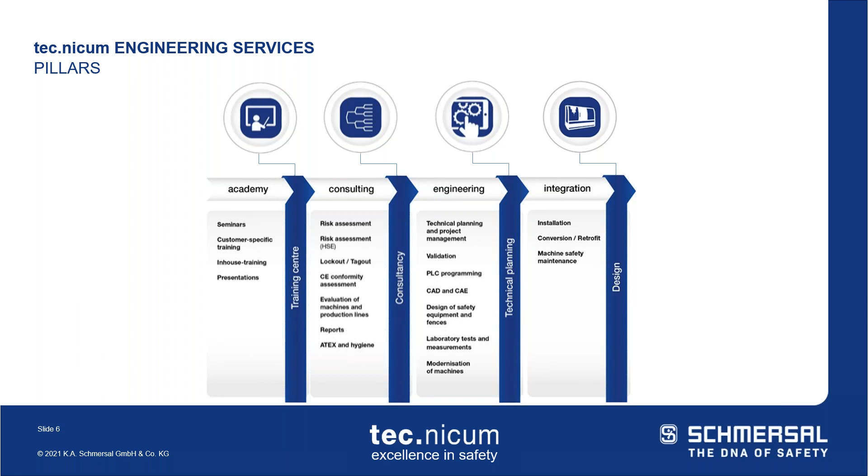All right, so again, we're going to take some time to look at each one of these pillars to further explain what we do within our engineering services department, and that first pillar being academy.

So what are some of the courses? What are some of the trainings that we offer? The first one I want to point out is the OSHA training. As you may know, OSHA has this outreach training program for general industry. They offer courses that are 10-hour or 30-hour courses. Following the course, you would get a certificate from OSHA, like a little card stating that you completed the 10 and or 30-hour course. This is something that we are able to offer, all right?

And this is the official OSHA program. So if you take it with us, you will still get the official OSHA card as you would have gotten if you'd taken it directly at an OSHA training center.

I mentioned taking part in an official OSHA training center, because that's the only place where OSHA will teach the 10-hour and 30-hour course. Whereas at tec.nicum, our engineers and instructors have gone through OSHA train-the-trainer, so they are OSHA authorized trainers to provide the 10-hour and 30-hour course, which is why you'd be able to obtain that official OSHA card.

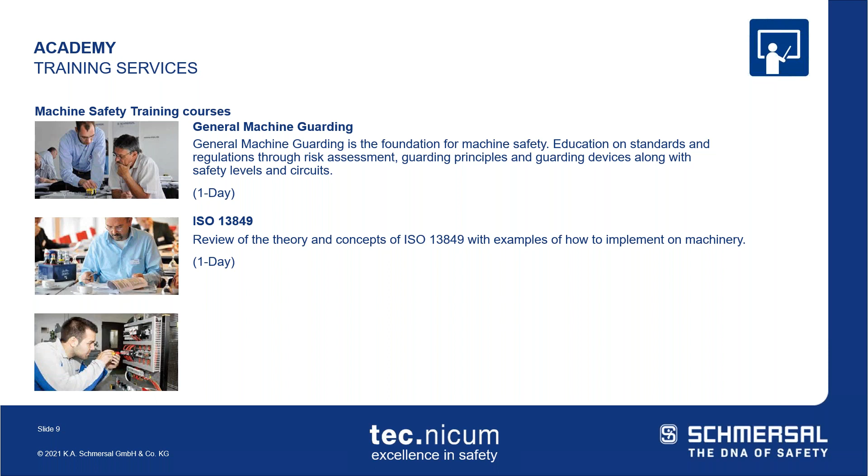But one thing we do is pull examples from the class. We say, okay, let's look at a machine that we may all know, and let's look at some safety functions, and let's do the calculations together to help drive the training home. So it's definitely a more hands-on approach than a lot of other standard trainings I've seen, something a little more unique.

Also, looking at some hands-on training, we offer a safety circuit and wiring course, a full day where attendees are given a trainer board, essentially a safety controller, some contactors, some push buttons, and some LEDs to turn on that would simulate a machine turning on. We go over the different concepts of categories and safety circuits.

What does a reliable safety circuit look like? What does a redundant circuit look like? Then we throw in faults and errors into the circuits to show you exactly what you're gaining going from a single channel circuit to a redundant circuit with monitoring. There's one thing to talk about it, and it's one thing to even see a schematic.

It's another thing to actually wire it up. So this is more geared towards electrical technicians, maintenance personnel, and controls engineers who have an understanding of circuits. Then we go further to say, here are safety circuits, this is what a safety circuit actually looks like, this is what you're gaining. We go over some things common within the industry that aren't really safe, some misconceptions, and then go over things that actually make a machine safe.

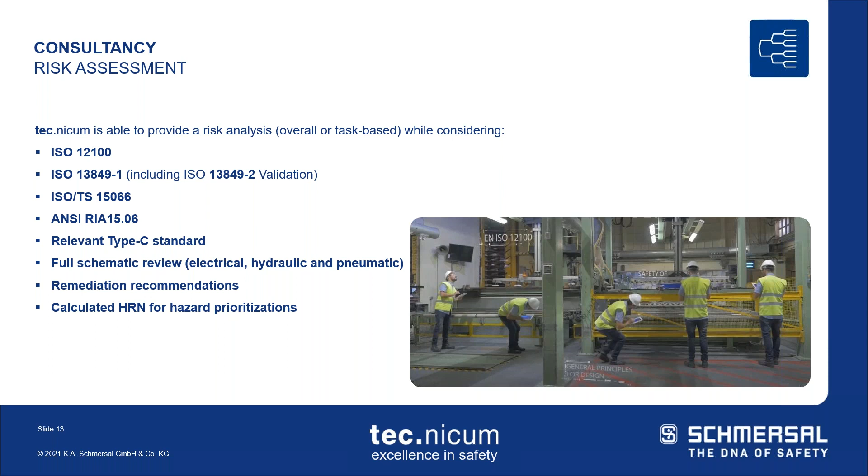Okay, we not only identify the hazards, but we also quantify the hazards that we identified, and we give it this HRN, or the hazard rating number, so that you can then prioritize those hazards on the machine, and then you can do with those as you see fit.

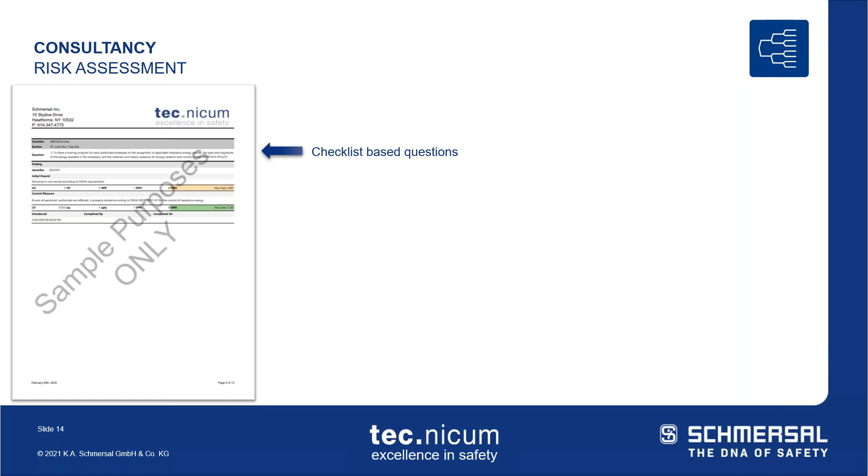Okay, here's an example of the report and an HRN. So again, what we have with our software is pretty much a checklist that we've created, and we go through the machine, going through these questions, which is a little under 100 or so questions per machine. For anything that we find that's not compliant, we flag it.

We give it an HRN, again, a hazard rating number, based off some parameters. We provide a recommendation, again, a general recommendation, and then provide you what the new HRN would be, right, if you were to apply some of these control measures.

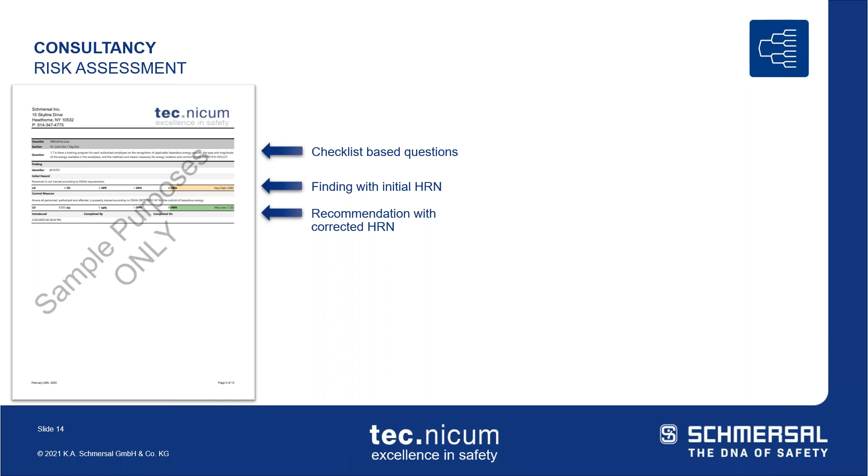Whenever there's a picture that should be attached to that hazard that we found, so if it's an exposed rotating element, we'll take a picture and attach it to the report. For those customers that are looking into ISO 13849, we also provide what a performance level should be if you were to apply a safety function to this machine.

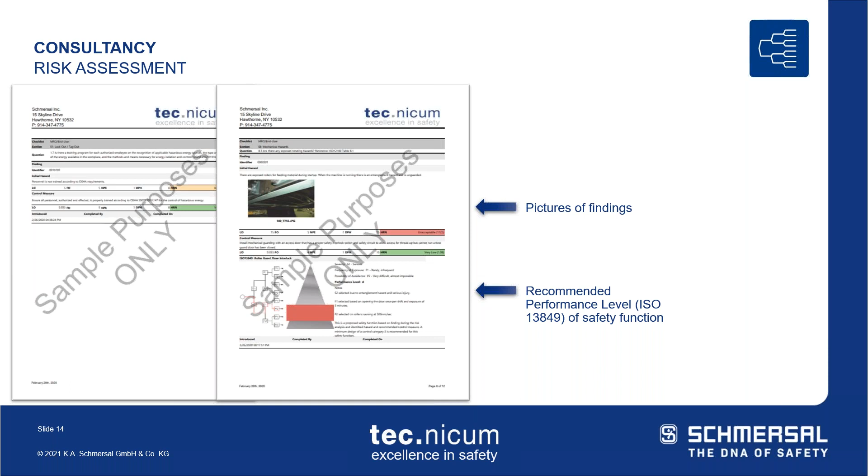And so if you say, okay, let's add on this guard door interlock because we have a guard door that's not being monitored, we will say, okay, based off observation, based off this analysis, your safety function should be performance level D. Okay, again, just providing as much guidance as we can.

And then also at the end of the assessment, part of the deliverable would be a full extraction of data from our software inside of an Excel form so that you can easily sort out all the hazards and findings. So if you say, okay, we just did 10 machines and you want to identify those hazards that are ranked very high, you can easily sort that out.

Or you can say, okay, let's look at all the hazards that are low, kind of low hanging fruit, things that we can tackle immediately. Then again, you can sort that out and address it as that.

Within consultancy, we have this service called OSHA violation remediation support, which is pretty much us helping you deal with OSHA inspectors. So if you get cited by an OSHA inspector, we can help you understand exactly what the issue was and the best way to go about correcting that issue.

Okay, so if it's on one machine, while we're in there helping you correct this one machine, since we are on site, we can also do a quick walk around with you to make sure that the inspector doesn't come back and ding you on something else.

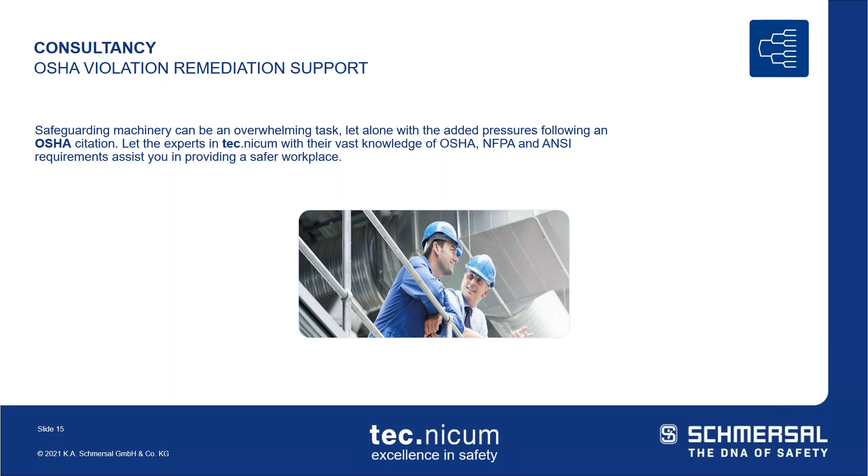But again, because we have this industry knowledge of OSHA, NFPA, and ANSI, we are able to assist in these North American requirements and help make sure that you are fulfilling your due diligence to the general duty clause from OSHA.

Okay. Again, going back to ISO 13849, another service that we offer that's related directly to this standard. For those customers that are either building machines and your customer wants to have them meet ISO 13849, or if you're an end user who wants your machine to meet ISO 13849, we can help with those conversations and the calculations. So we use SISTEMA.

Again, if you're familiar with the standard, you may be familiar with that software. We use SISTEMA to do the calculations for their safety functions to help make sure they are where they need to be. Now, with us, not only do we do the calculations, but if the calculations aren't where they need to be, we don't just document that. We actually help you out.

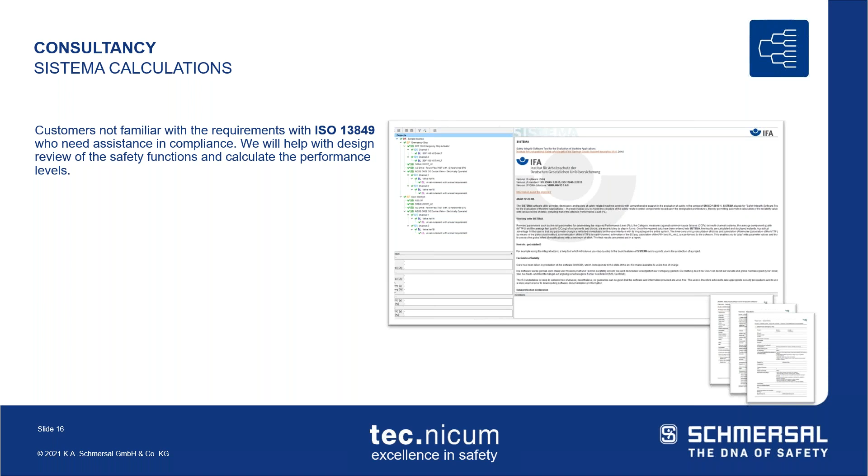So if your assessment says you need to be performance level D and the calculations are coming out performance level B or C, we provide that guidance to help you get to where you need to be. So it's all about, again, as much support as we can give you to help make sure your machine, your site is safe.

Okay. Within this pillar, we also offer the service for creating a safety standard. So if you're in an organization that does not have a true safety standard in place, we have done this before with customers, and this is something that we offer. And this can be locally, if you're a national company or a mom and pop shop, or if you are a global company.

And what we do is have these in-depth discussions with you, because we have to understand the type of machines you have. We need to understand what your vision is, and then we provide all of the guidance for the safety aspect of it. So within this document, you would have guidance on whatever standards you're trying to follow. So if it's ISO 12100, 13849, if it's a Type C standard, if you want to follow RIA 15.06 for the assessments, we tailor this so that it meets your requirements.

Some things you see on this slide would be schematics. So once we have that discussion and you say, okay, as a bare minimum for all the machines within our company, we want a category 3 circuit. So within that document that you're now going to implement, we'll throw in examples of what a category 3 circuit looks like. What type of components within the industry can you apply to meet this cat 3 circuit?

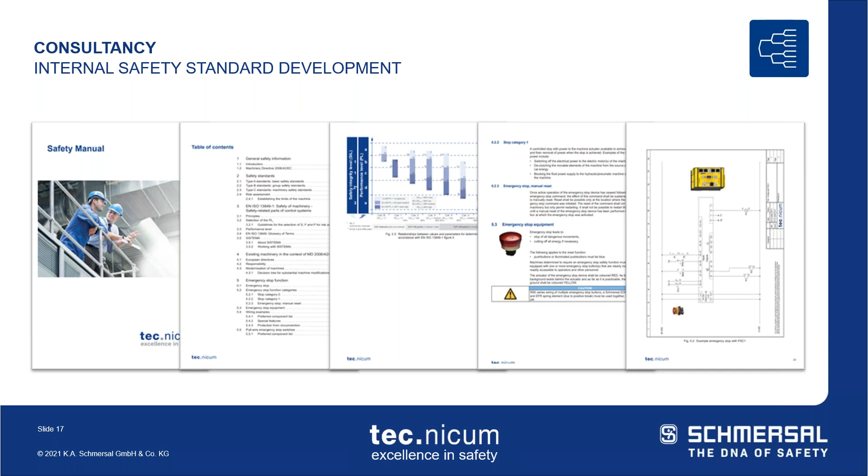How do we actually wire that up? So, a full-blown safety document tailored directly to your needs. Okay. The last thing within the consultancy pillar would be CE. So not only do we offer the training for CE, but we help you along that entire process to make sure you get the CE declaration for your machine.

And I say we help you because the CE is a self-declaration, right? So we help provide all the guidance needed so that you can do that self-declaration. We are able to offer services to hold that technical file in Europe. So, for those of you who are not too familiar with the CE process, if you are shipping a machine over to Europe with the CE declaration, one of the requirements is that you have to have all of the machine information held locally within Europe.

So if you don't have a partnership in Europe to hold your machine documentation, we can do that for you. And also we provide the EMC testing for those machines that require EMC testing, right? So if you find yourself trying to fulfill the EMC directive. Okay. Before we move on to the next pillar, I will stop and see if there's any questions based off of those services within consultancy.

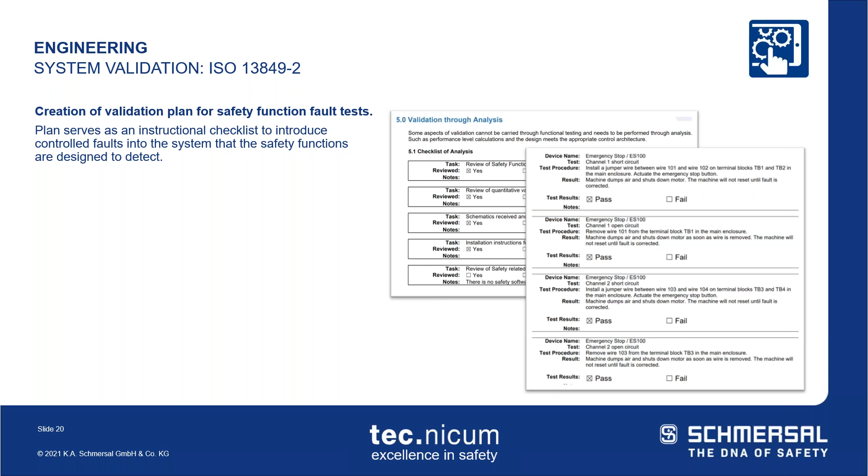So what we do is we go through the entire schematics of the machine, look at the safety functions, determine what they need to be, determine what faults need to be introduced. We create a checklist. We then provide you that checklist, or we can go on site to actually perform the validation that we created the checklist for. But again, if you follow ISO 13849, that is a requirement.

For anyone installing devices that do not provide a physical barrier, so you're looking at light curtains, laser scanners, safety mats, 2-hand controls, there's nothing that's going to stop someone from reaching past a light curtain or walking on a safety mat to reach the hazard. So you have to make sure that you are installing these devices at a safe minimum distance. And in order to do the calculations for a safe minimum distance, you must do a machine stop time analysis. So that is something that we offer.

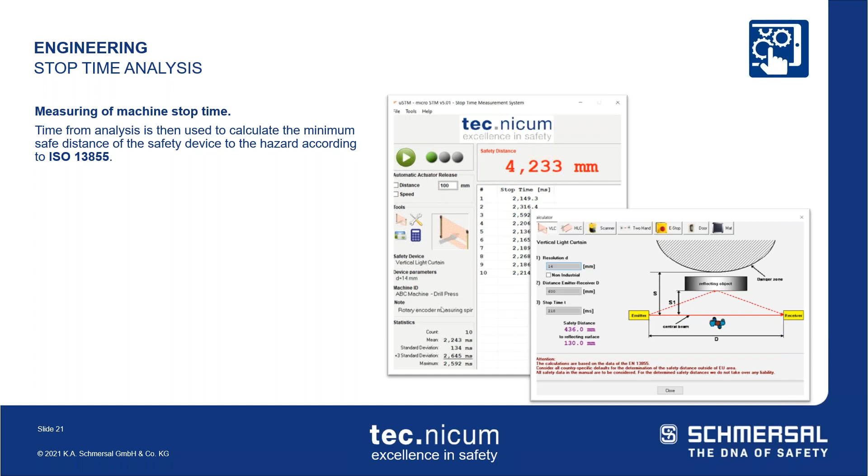We go on site, we use our micro STM tool to do a full stop time analysis on the machine to determine how long it takes to reach the safe condition, and then we can provide the calculations to help you install or reposition that safety device to make sure that you're meeting these requirements. This is something that has to be done, right? A safe minimum distance has to be done on the primary safety functions, the light curtains that are being installed, but it's something that is overlooked very often. But again, that goes back to education, being able to educate you on exactly what are some of these requirements.

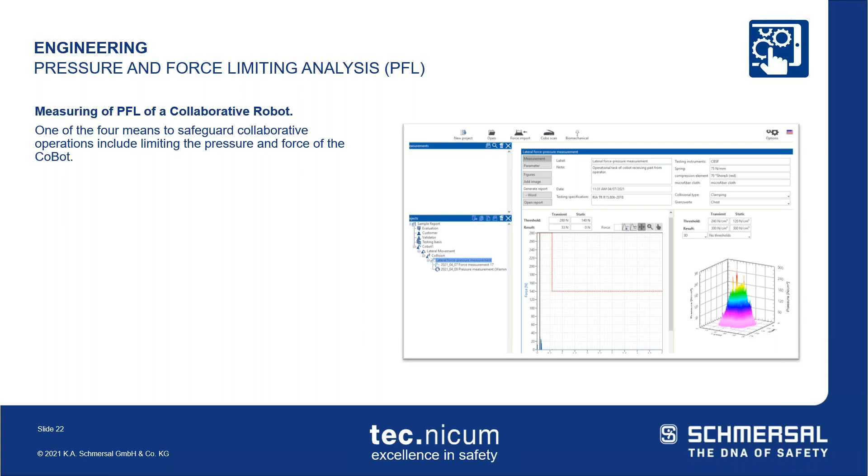For cobots, for those that are involved with collaborative robots and you're looking at some pressure and force limitations, we can provide this service. There are several different ways to safeguard a collaborative robot, and to get that true collaborative application where you have the cobot and an operator working side by side, one thing to look into is having the right pressure and force limitation set.

So what we are able to do is, again, go on site, have a discussion, look at the entire application for the cobot, and determine, based off our measuring kits, different pressures and forces. Right? We then compare that to the thresholds that are called out by ISO TS 15066 and/or RIA TR R15.806, depending on what standard you'd like us to use, to help make sure that those pressures and forces are not exceeding the thresholds.

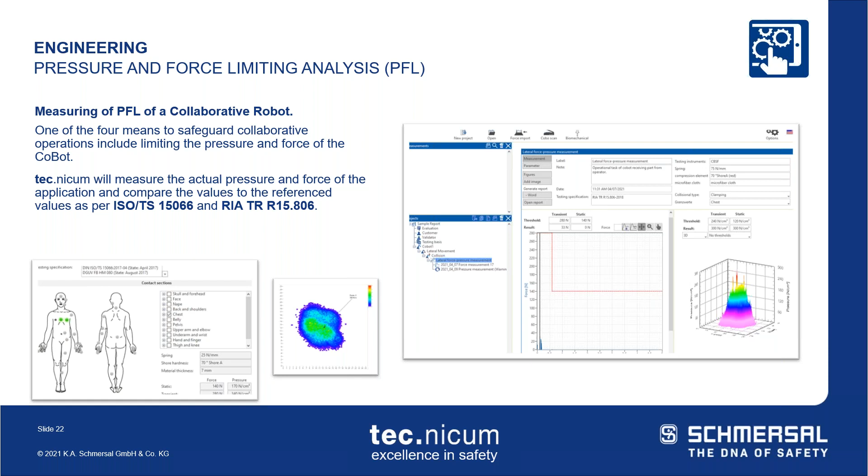And so we look into the standard. You have certain pressures and forces that are tolerated for the chest area, the forearm area, the back. So we do different tests on our kit to make sure that you're not exceeding those pressures based off your application. Okay, so as you would imagine, very detailed, very in-depth, but something again that's overlooked that you may be needing for your cobot application. Okay.

This is the only thing that really ties us back to Schmersal, right? So within all of our engineering services, this will be the only thing that ties us back to a Schmersal product. So for safety PLC programming, our PSC one, we do provide guidance on this. So whether it's in-depth training or actually programming the safety controller, this is something that we offer, but as you would imagine, it would have to be our safety controller, right? The Schmersal safety controller, PSC one. But a service that we offer.

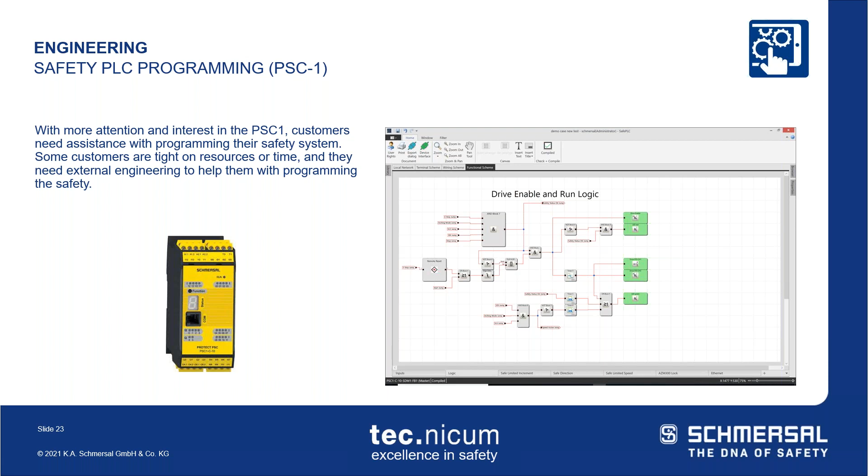Lastly, we offer the schematic review. So if you go into our training, right, and you say, okay, we're gonna go back to the site and start upgrading some of these safety circuits, or you go into our safety circuit program, or we just completed a risk assessment for you, whatever the case may be, right? And you are upgrading schematics, or you have a new machine coming in, you have the conversation with the OEM, and you want to make sure that what you're getting is what you need, or you're upgrading to what you need it to be. We can provide assistance with that.

So we will look over the schematics, help guide you. We can create the schematics for you if needed. But the overall schematic review is something that we offer. Again, help make sure you are getting or you are designing exactly what you need for that safety circuit. Okay. One more pillar, but again, let me stop.

Okay. Devin, before we move on, I do have a couple questions. Is there a document required that the stop time meets the risk assessment evaluation?

So when you look inside any documentation from a manufacturer, right, it will tell you that you need a stop time analysis. When you look into ANSI requirements, ISO requirements, they'll tell you that you have to do a stop time analysis. So when you do your risk assessment, right, and you get to those components that do not provide that physical barrier, such as the scanner or safety mat, that should be a question that pops up. How do we install this at the right distance? Has a stop time analysis been done?